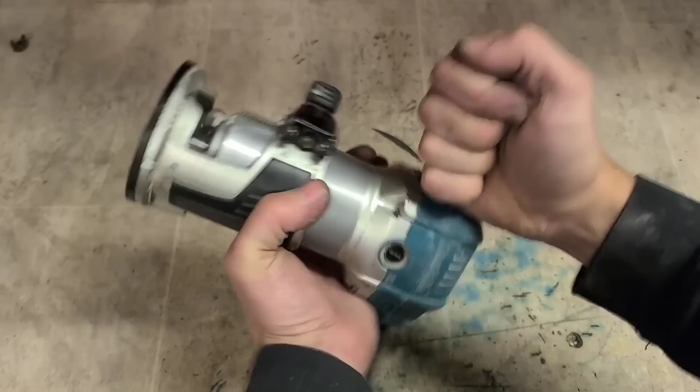Well folks, welcome back to the workshop. Today we're going to start off with a Bosch Jigsaw. This is a GST 150 BCE, one of the bigger corded Bosch Jigsaws from 2014, with a 780 watt motor. Good heavy, decent machine.

Let's see what's wrong with her. That's an odd one. Not seen that before.

It's just kind of pulsing. So I would imagine that will be a speed controller issue. Can't really be the motor because she's not running properly. It's not going to be the brushes because it's pulsing too regularly.

Yeah, let's see the speed controller. Get in and have a wee look. Hopefully there's an indication that's the speed controller. Don't think it could be the switch,

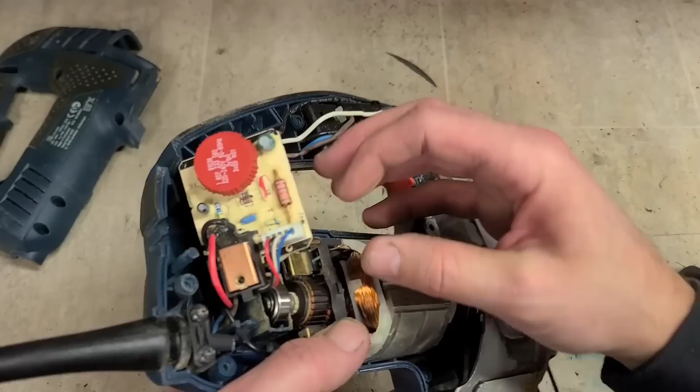Yeah, speed controller, that resistor's all burnt low. So a lot of current has run through that, causing it to actually melt this here glue, this binder. Right, we'll go with the speed controller.

Switch feels fine, I can't imagine much is going to go wrong with this. There might be variable speed on it, but there's also full speed, so if it's the switch, it should either work on the variable or the full. And I don't think it should cause any pulsing like that.

More than likely this here. So the wee MOSFET in here is not getting correct current or something, she's just pulsing and not running correctly. She caught there as well.

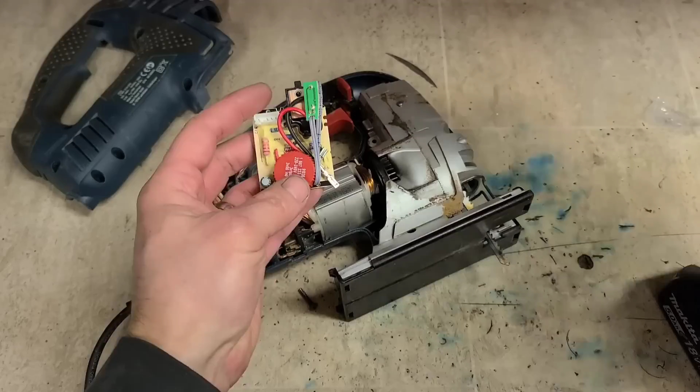Right, go with that, see if we can get a speed controller for it. Speed controller for this one is 1607233368, and she seems fairly straightforward too.

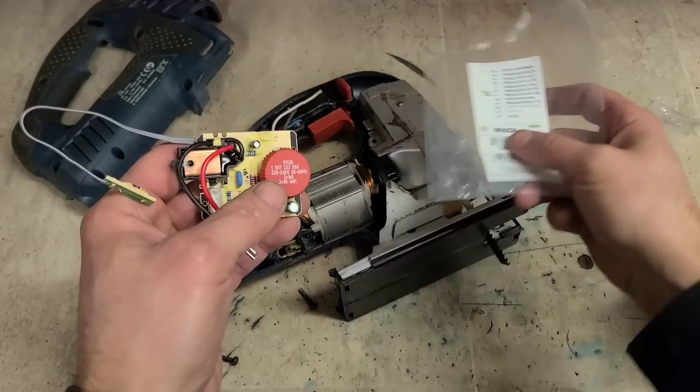There's actually written on the dial as well that it is the correct number. So if you ever don't have the breakdown diagram, you can just go by this here. Not often you actually see it on there, mainly because the cover is actually only letting you see this, you never see the face of it.

So which way is this going on now? Plugging on there, you've got a little wire running over here, little sensor is it? Yeah, for your speed control. And these two wires here, the black and the red, they must be going onto the field or something.

The red's going on here and the black is connecting to the field over there. And this one is just running to here. Pop that out and pop this one on.

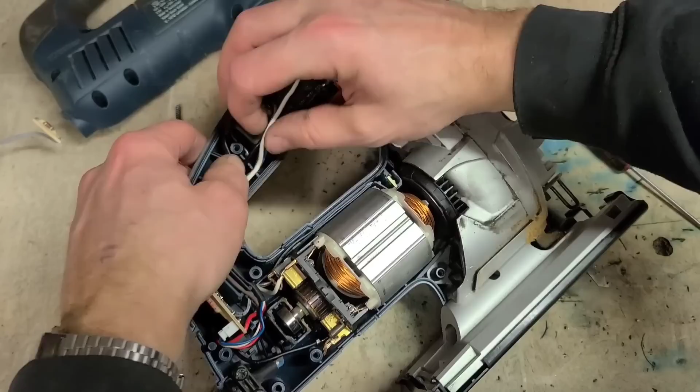One new speed controller and she's up and running. Not so bad, nice easy fix to start the day off with.

Now, might be quick and easy, but it's not cheap. That particular part, the speed controller, costs about €50 from Bosch. Expensive part, but still worth doing. This particular model of Bosch Jigsaw costs about €230, so that kind of money, that's less than a quarter of the price of the machine, so it's still well worth doing.

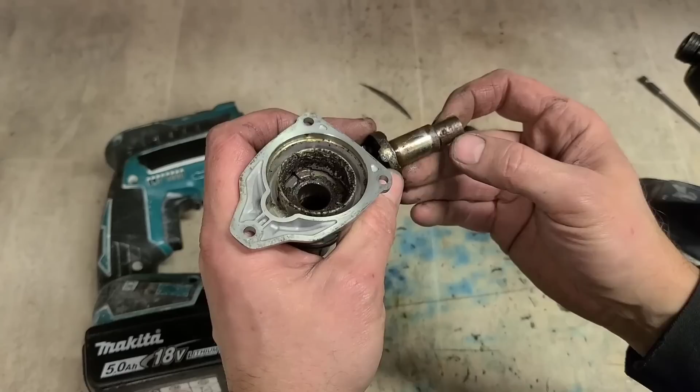Might just be a little bit of corrosion on it. The actual clutch isn't too bad either. So whenever you run this, the motor's always running, but the spring in between the two, it's only when you actually have a screw being pushed against it, when you bear it onto a screw to drive, it actually overcomes the spring and locks these two gears together.

That's just a wee clutch then built in. I think this is just dirty, to be honest. Maybe not so much dirty, but rusty. I think there's just corrosion on this. Give it a wash out, give it a wee rub with a bit of emery paper or fine wet and dry, see if that helps it out.

Actually, it wasn't even corrosion. There's a little bit of rust on this, but that didn't matter. It was actually just dirt packed in. There's a metal bush in here. I actually thought that went the whole way down. It didn't. It was actually just dirt jammed solid inside. Had to scrape it out with a flat blade screwdriver to get it cleaned out.

Now there's a little oil seal on this. It must be gone. But you can't buy that. You have to buy this whole head as one piece. Apart from the wee bits on the outside, you can't buy anything on the inside. But clean it out and it will run again.

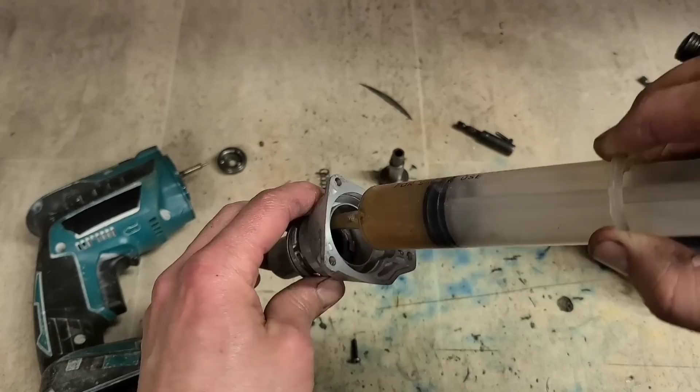Hopefully this is all this thing is going to need. Just get a bit of grease down in there too. There is an O-ring down in here as well. That was all packed out. It's a little bit more difficult to get that there cleaned. But there's also a wee flat ledge down there. Try to get some of that grease inside of it, just so there's like a little reservoir in there so it doesn't dry out as easy. Rather packed it with grease than with grit. And that should be it.

There's no problem now, look. A little bit of grease in that wee clutch. And a little down in there because that's actually a needle bearing inside of there. And your spring goes into the middle of it. And you can just stick this back together again. This part here is actually your little clutch.

You've got 3 steel balls that can slip if that gets too tight. As well, you've got 2 flat washers on top of this as well, just sit on top of one another. They're just sitting down on there, and then this just goes on top. It's not overly complicated.

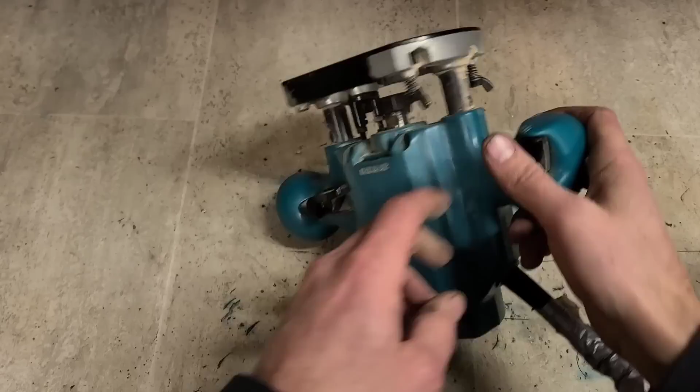Now, the bearings are gone too bad. Might not be able to be fixed. Could have melted the housing. That was on tight. Push out your lever and your very special nut. If the housing's been melted, it wouldn't really be worth replacing it, to be honest. So we'll have a look and see first. Never know, I could get lucky.

These are quite hardy wee machines. They can actually take quite a bit of abuse. So hopefully it is salvageable.

Not looking good when she's this tight to open.

Might need pry bars for this one.

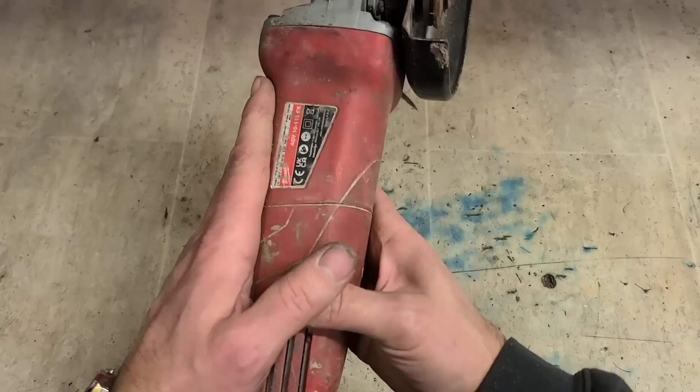Wee Milwaukee grinder, 110 volt. What's that? An AGV10115 KE. Not working. That one's just a power cable.

Now, that was a nice simple one. One Milwaukee grinder, just needing a power cable.

Now, next up is a very complicated and expensive repair for a Makita drill. Customer says it needs a new chuck. Luckily, I'm doing this long enough now, I know he's probably wrong. So, needs a new chuck because it's not holding anything. They all say the same thing. Say it needs a chuck, but they don't actually look at what the problem is.

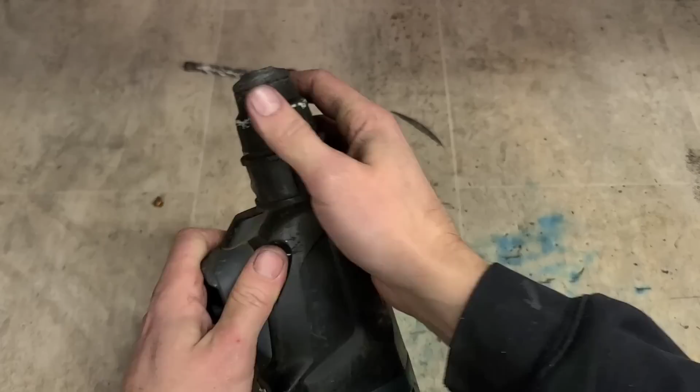Looks okay, but how can it be releasing the bit when the sleeve doesn't work, doesn't do anything? Watch this for a simple fix.

It's just a rubber cap. Pull that off. Ta-da!

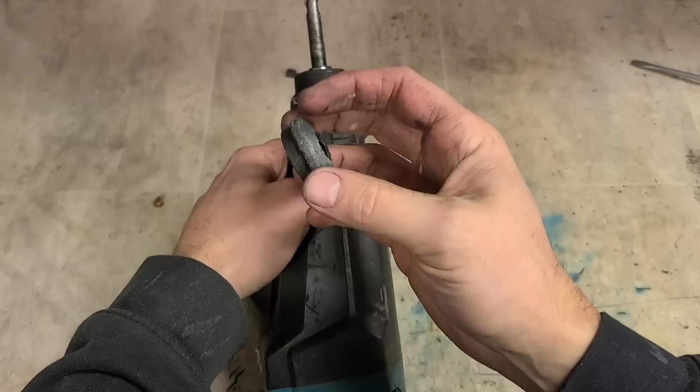This is the problem. The cap's actually worn. He's been drilling too close to the concrete, to the wall. He's been drilling all the way in. You can actually tell from the way it's worn here as well. He's been rubbing it off the concrete.

So as it's drilling, it's just eating away the rubber cap, which takes away the cap top end of it, which holds it on, and eventually it starts pressing down and down and down until it gets jammed up solid. So this is pressed on totally. It can't move and the sleeve can't come up again. Remove the cap and it works.

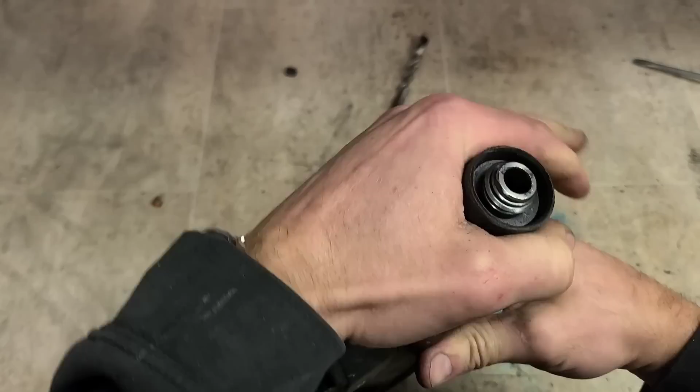Now, you also had this twisted, which generally you don't need to worry about, but this one we do, because this particular sleeve doesn't actually twist, it just goes up and down. Some of the older ones you could twist them around, didn't matter, or some of them you can twist it to lock it. This one's just straight up and down. Once you twist it, it gets into the wrong position and it no longer functions either. So just to make sure it doesn't happen again, we'll have to change that too.

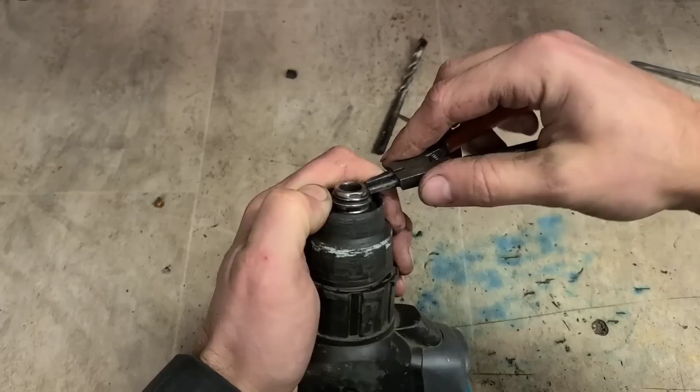So it's gone from a complicated, expensive repair to a cheap and cheerful, easy repair. Pop them off.

This man is probably wondering if it was even going to be worth fixing this thing, because the tool holder, the chuck, as he says, is actually part of the whole spindle of the machine. This goes all the way in, to the piston on the inside, which is a full strip and tear down, which can sometimes be an expensive repair.

Pop that wee boy off. Take that out. Everything else looks okay. I'll pop a wee bit of grease in there to make sure she's moving. And we'll replace these two parts, because this one here now, they're meant to have two flat spots. You can see that's rounded over now. So change them and we'll fix the problem.

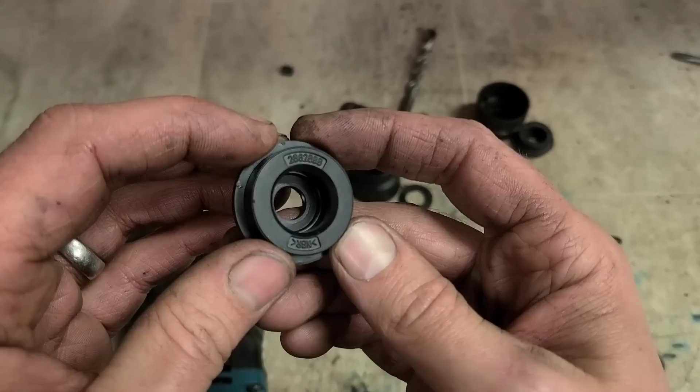Two new parts. They cost what? €1 or €2 each. So a very cheap repair. 451533-2 for the sleeve. And the actual cap, 286288-8. You get these all the time. This is quite a common repair for the Makita ones. But luckily, it's also nice and cheap.

Push them on. Put your clips back on again.

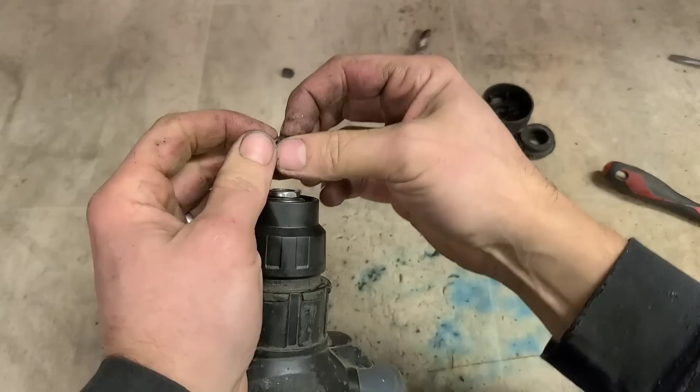Now if you're in a hole and you're stuck and need to get the thing running, you can also just pull off that rubber cap. And that'll do the same thing. But you eventually do want to replace it to keep the tool holder good and stop bits getting onto it. That's her.

No new chuck needed. There's no actual chuck on these, it's a tool holder. And for only a few euro, she's up and running again. That's one Makita HR2630 with a nice cheap and cheerful fix.

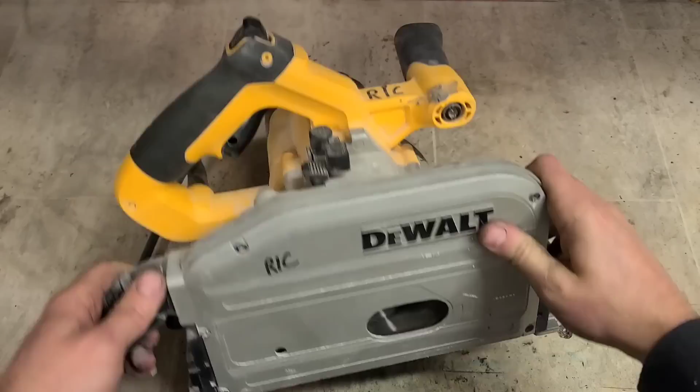Right, next up we have a Dewalt Plunge saw. Customer says this one has a sticking trigger. This is the DWS520 Type 3. Not sure the year of this one, doesn't look too old, a wee bit dusty, but I don't think it's done a wild lot of work.

Blade spins. I don't think that's the trigger. I think that's the actual lock. See this boy up here? That's not. Something's jamming that. If you push it hard enough, the trigger does want to go on.

But she doesn't seem to be plunging either. So unless the lock in here is gone. Crack her open, let's see what the crack is.

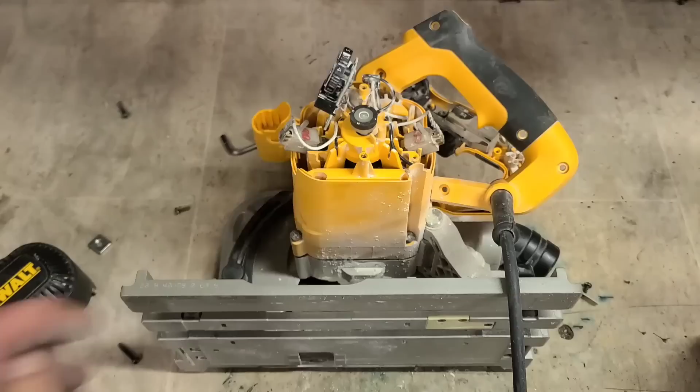Lovely. Take off the taco on top as well. Now, is that pressed or threaded on? I'm going to guess and say it's pressed on because there's no real reason to thread it on. Yeah, just pressed.

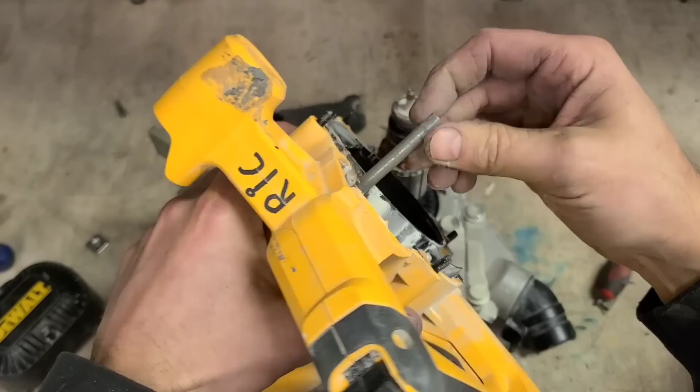This is the spindle bar that's coming up, that seems to be getting tight or jamming on something. Bearings seem okay anyway. See, with that out, it's actually moving no problem. So it's just jamming up on something here.

Unless it just got jammed with dirt or something. The mechanism down here seems to be working. The lock and release is working. The knob is working.

Right, a chance giving this a blow down. Clean out on here, might just be the dust. Can't really see anything else that's going to be causing that. With it removed, it does actually plunge as well. And it's free enough, so we'll clean all this down and put her back together again.

Right, this might be as simple as dust. Don't know what this man is cutting, but it looks like chalk dust, plasterboard or something. Maybe I don't know why you'd be using it, but I can't see why you'd be using a plunge saw for cutting plasterboard. All packed up out in here, loads of it sort of spewing out everywhere. Every nook and cranny was actually covered in it. So hopefully it is just dust that's the problem. We'll soon see when we put her back together again.

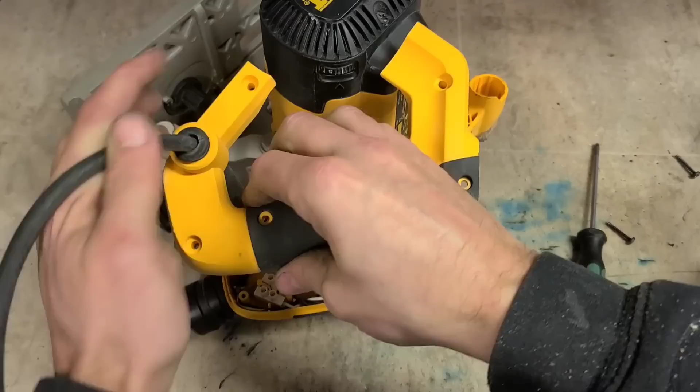Just to go on together. Handle as well, it's all cleaned out too. Just make sure I haven't moved anything. Lever still in place.

No, that's still not right. There... should be nothing else on there getting in the way.

Even more dust on here, look. I'll clean this out first. At least that's just normal sawdust. Can't see anything from this end. It's a sealed housing there.

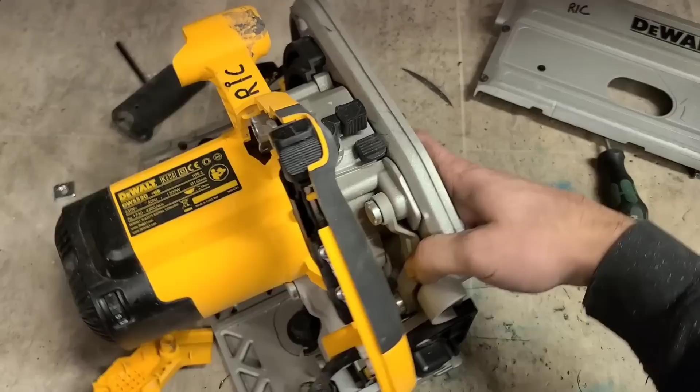Yes, we're going back in again.

That's definitely working. This definitely moves. So which is at fault?

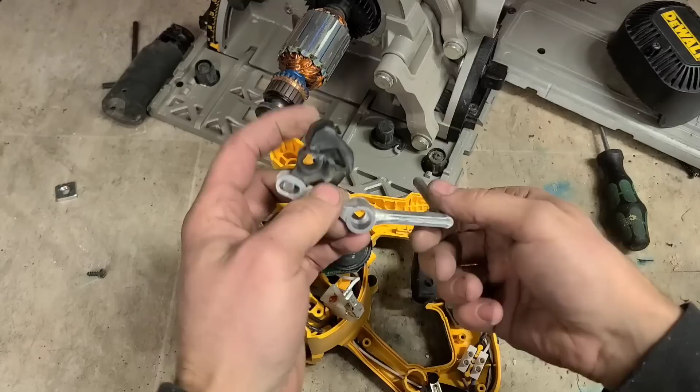This one's in the middle. It's locked. When it goes up, it's free to move. Whenever I go on here, it goes down halfway or something. It goes in, that's free enough.

But it doesn't do that when it's installed. It's nearly as if it's jammed. Could it just be the way it's installed?

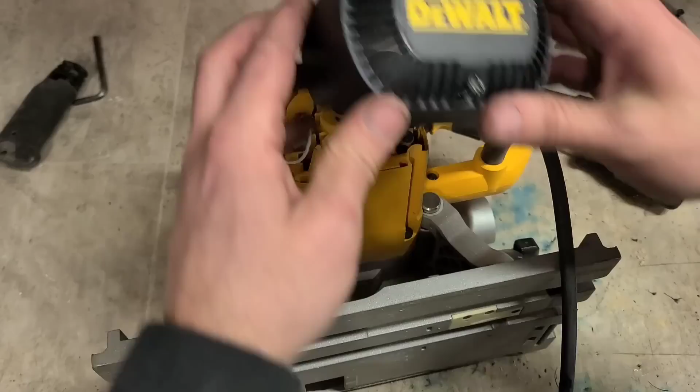Must need to go on with speed control. Yeah, put the two in together.

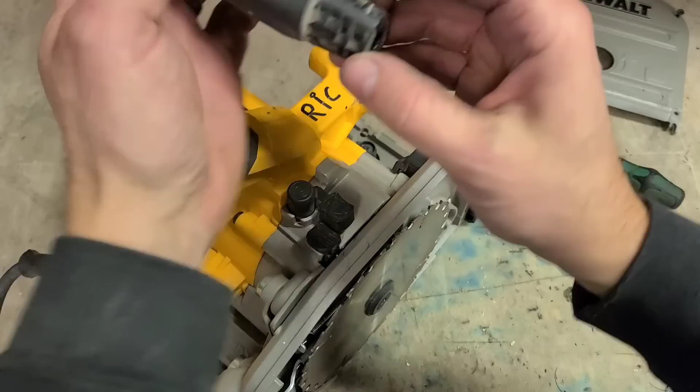Handle then, big square nut inside of it. And that just screws on.

I think this is still working. Yep, might have been all she was - dirt and dust and misaligned.

Back the Allen key, and that should be her. Switch is going up, releasing, plunging, no problem. Got to make sure she actually switches on.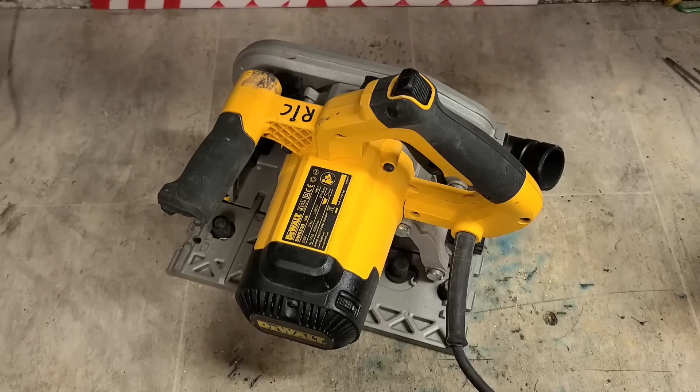That's her. One DWS520 Dewalt Plunge saw, 240 volt. With a sticking switch and not plunging.

Problem is just dirt and grit getting in and jamming up that hole, or else somebody's had this off before and put it on with the actual pin, the bar pressed against the actual side of the lever inside here and jammed it. But I would think it is actually just the dust that was inside blocking it up. But that's her, up and running.

Now, what am I meant to do with this mess? Look at the state of this one. Obviously, cutting a lot of concrete with a diamond disc.

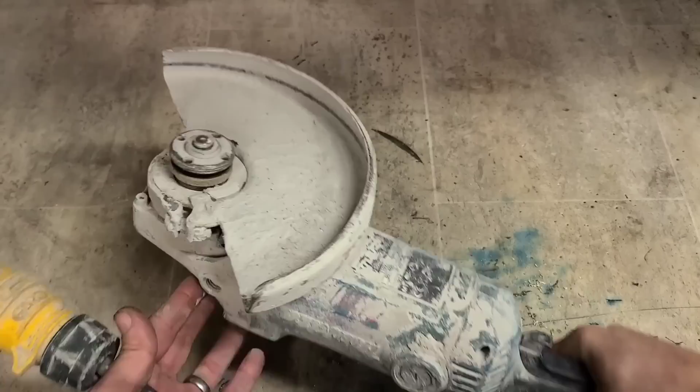That guard's bent that way, it's meant to sit there. But she's a bit dusty. There's actually a 7-inch grinder, is it? No, it's the cheaper 9-inch. There's the GA9050. These are just a wee cheap and cheerful machine, to be quite honest, from Makita.

These are actually, as you can tell from the size of it, actually a 7-inch grinder. So these are a very good 7-inch grinder, but they've changed the head and the gears to make it into a 9-inch. So this is actually very cheap. It actually works out cheaper than the small Makita grinder, the GA9020.

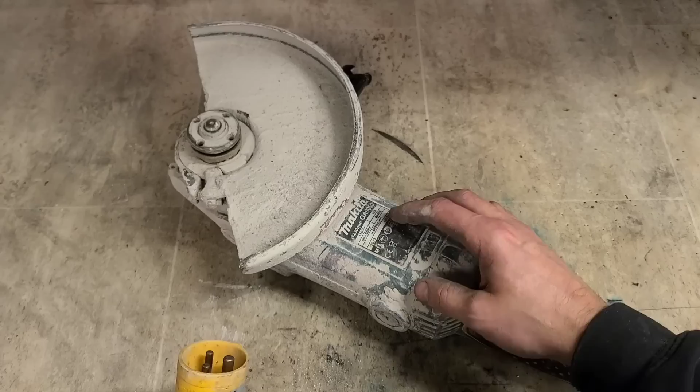The numbers make this a little bit confusing actually, because the small 9-inch Makita grinder, the good one, is the GA9020. Then the good big heavy duty one with the bigger motor is the GA9040. But this one's the GA9050. Bigger number, makes you think it's the bigger grinder, but it's actually the smallest of the lot.

2000 watt motor, wee tiny head in it. More of a space saver, to be quite honest, because of the small head. You might be able to get in tighter spaces, but that's about it. They're not up for much work, to be quite honest.

This one, mind you, is doing fairly well. She's actually a 2013, so she's 11 or 12 years of work behind her already. But wouldn't recommend them if you're looking for a 9-inch grinder. If you're doing a heavy sort of work, they're not good enough for a small compact 9-inch grinder. If you're doing lighter sort of stuff, or if you need to get in somewhere tight with the head, that's what they're good for. For most other things, I wouldn't recommend them.

Have one of these myself at the house, and I know from the armature, the actual spindle of it ain't up to scratch for the amount of work that it can be doing. But what's wrong with this one? Nope.

She's a bit farty. Don't know if that's the motor. She's 2013, so it could just be brushes actually. Yep. That brush is going alright. Gone but not worn out.

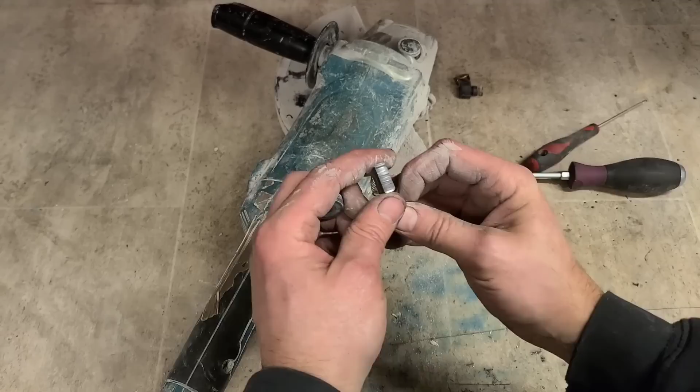That one's still making contact. Wouldn't be worth putting a motor onto one of these. She's a bit black on the inside. Oh, that's a wee bit of, that segment's a little bit blacker, I don't know.

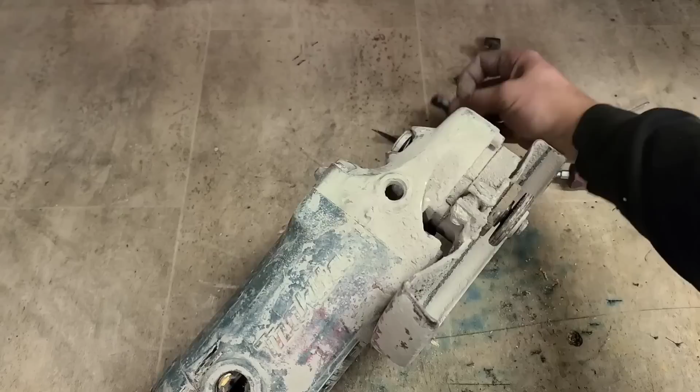I was going to say she might be alright. She could still be alright because she wasn't making contact. She'd be doing all that spluttering and sparking and burning up the armature like that. Can make it look very bad.

That's just black carbon from burning and from the brushes themselves. It's nothing really to worry about. You don't have to strip it apart just to clean that. You're not making any improvement by actually just wiping the armature. You make it look better, but it's not going to do any improvement on it. It'll look the exact same way once you actually start running the machine again.

The dirt that's on there now, if it is okay and it does run, it'll actually clean itself anyway with the brushes, so don't worry about that. Stick a new set of brushes in, see she runs. If she's good enough, leave her at that there. Now, brushes for this.

That's funny, two different sets of brushes are actually in this. This is a 204, the broken one, and the good one is a 203. Now the correct brushes for it, going by the breakdown diagram, is the 204s. That's the correct brush for this machine. This one is actually for different machines, some routers and grinders.

They're both the same size, going to do the exact same job, same ends. There's a little bit of a difference on the end, as this one has a wee bit sticking up and this one doesn't. But the biggest difference is the price. 204s cost about €24 a set, these here cost around €13 a set. So you can go for the right ones and pay more, or just go for the cheaper set, which I'm going to do now because I don't want to waste a good set of brushes on this thing, and they'll do the same job.

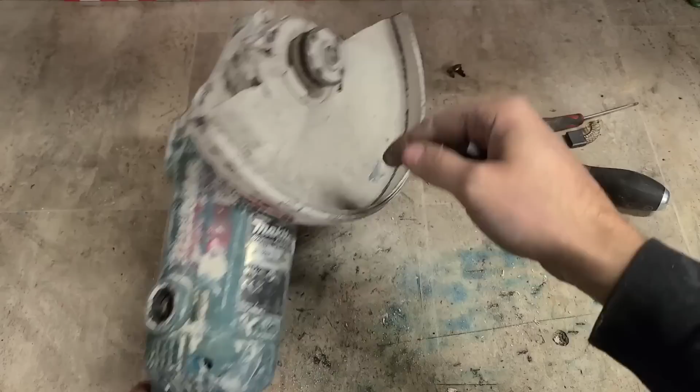That took off a lot less than I thought. All this here is just hard cement stuck onto it now. You could clean it if you want, but there ain't much point. Whoever owns it is going to be using it for the exact same job, and it's just going to end up the exact same way.

That's her, one set of brushes keeps her running. Just one brush - it started to burn, was losing contact. The bearings do sound a wee bit rough on it, not bad like, but you can hear them a little bit. I wouldn't be willing to do much more work to that thing though. Going by the amount of work it's done, its age, the fact the brushes did burn, plus the fact you have to strip it down to actually change the bearings, it might not be worth doing. Customer probably just wants it up and running again to keep it going for a while longer, so a set of brushes is just a cheap fix, and that'll do the job.

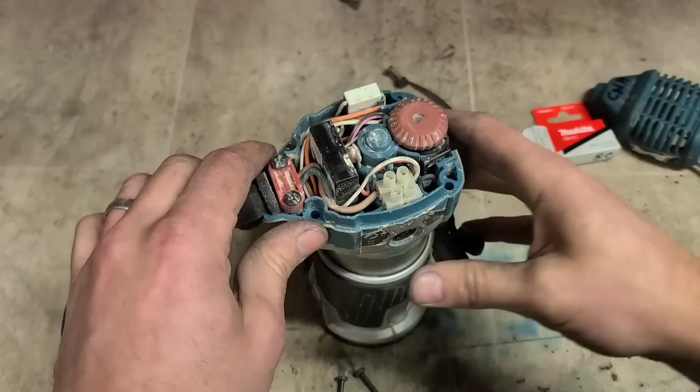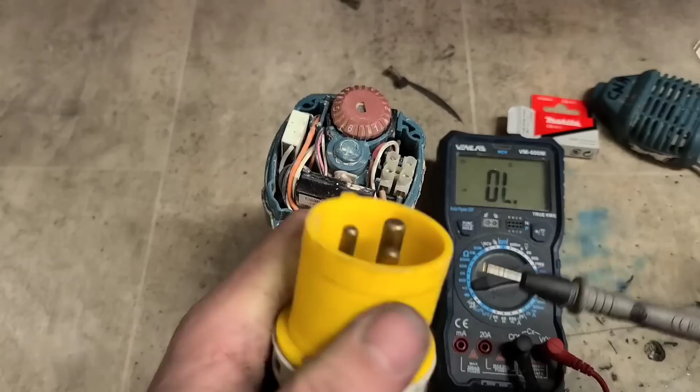First thing's the lead. It's not the lead.

Next one's the switch. Could be the switch, there's no cover on it. It's giving me nothing, so we'll chance that.

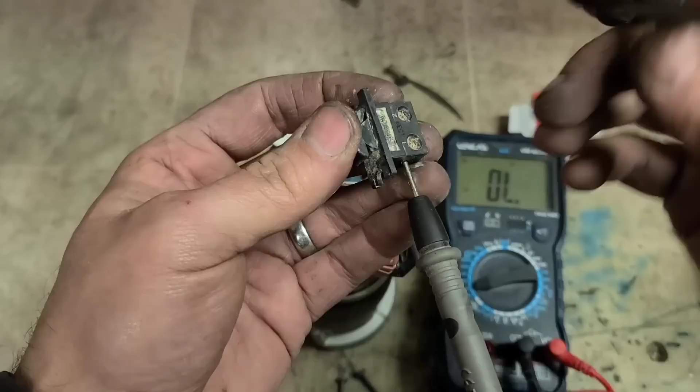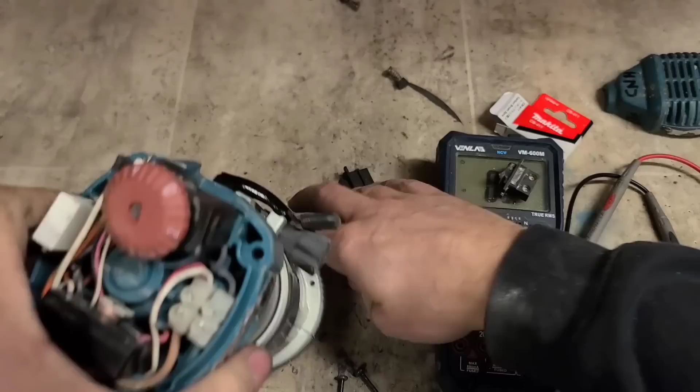Kind of making contact, but not very well. And there's no way to open that, so a new switch is needed. Let's just give the inside of this a quick wee clean. Not necessary, but may as well do it while we have her open.

Make sure. Hopefully that should do her. Drop that down in there. The little speed control wheel should go on top. Make sure everything's down, and that should hopefully be it.

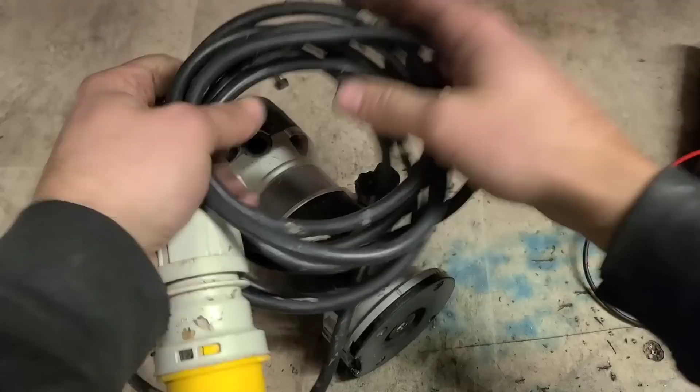Now we're on to the cheap and cheerfuls. Erbauer 5-inch sander, a Screwfix machine. What is she, the ER0400? What's wrong with this one?

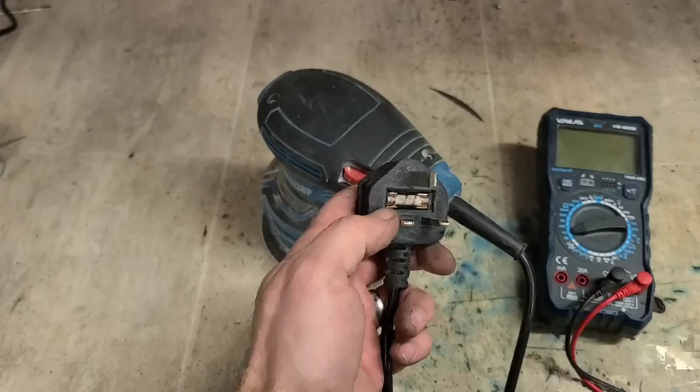Doing nothing. Could that have something to do with it? We have a bit of copper wrapped around the actual fuse, and it's wrapped around right, so it should still work. Wouldn't recommend it, but it narrows down the possibilities. Unless this was blowing fuses, so it could be blown out.

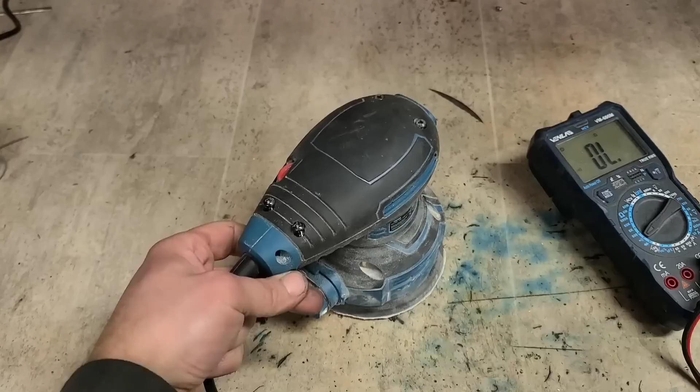What way is that? No, that's not right. Always check the simple stuff first.

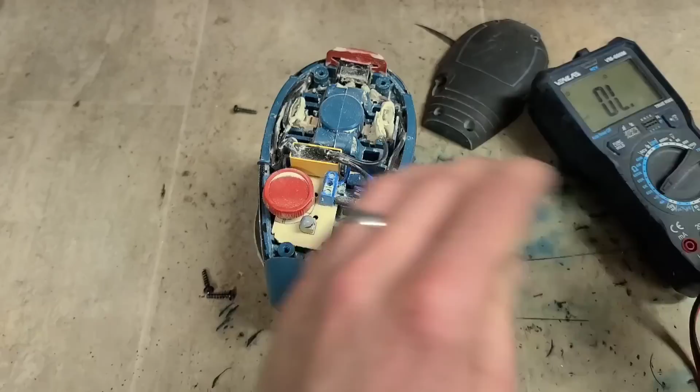Just like a Makita or a Dewalt sander, these little switches always give trouble. You just get clogged with dust and dirt, which I would say this one's also done.

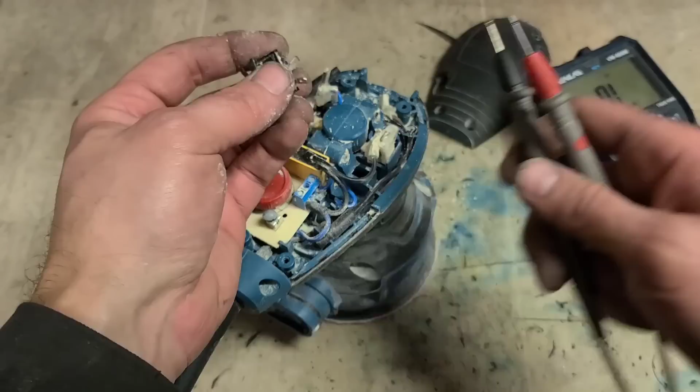There we go, there's a spring clip in the end, you have to push it on to get it to release. That's the problem.

Right, we'll try a quick fix on this because I'm not going to be able to get one of these, and going by the shape of it I'll have a hard time sourcing one. So we'll give it a quick blow with the compressor and we'll quickly fix that.

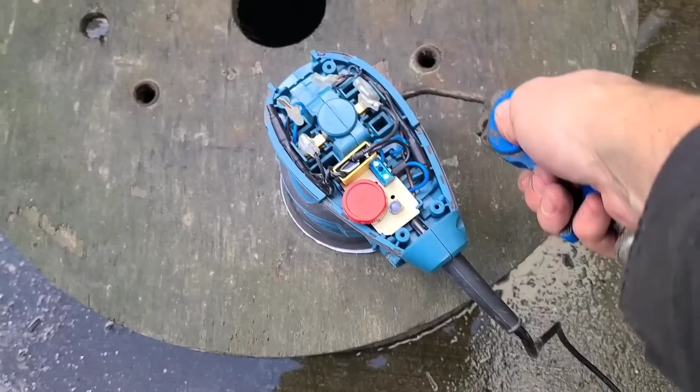Now the fix for this is nothing special, just an airline. Just clean out the dust. And that should cure it.

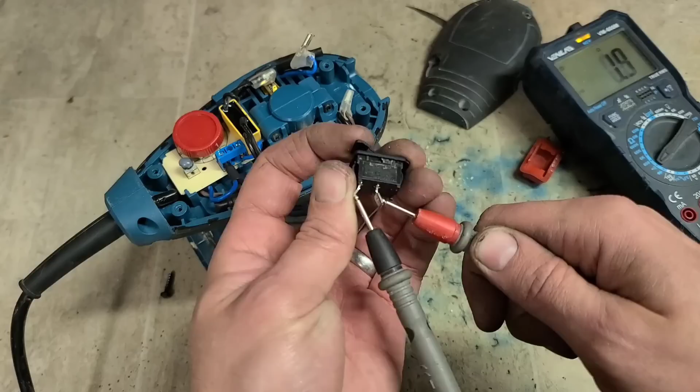Does that cure it? Simple as that. If that doesn't work and the air compressor doesn't get it cleaned out, get some contact cleaner and just flood it with the contact cleaner, flick it back and forth, and then use an air compressor again, and that should get her cleaned out.

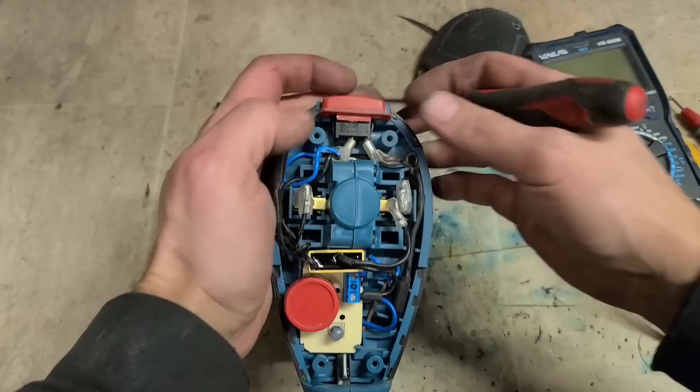Might be better that way around, with the spade facing up the way. Yeah, that'll be better. It's better.

Didn't need to take these two little side ones out at all. Give her a try there now.

What could be wrong with that? Can't really fault Erbauer for that, because even the Makita, the Dewalt and all have the same problem. But at least with them ones you can actually replace the switch. Well, I say that, you can do that for the Makita, not so much for the Dewalt, depending on which model.

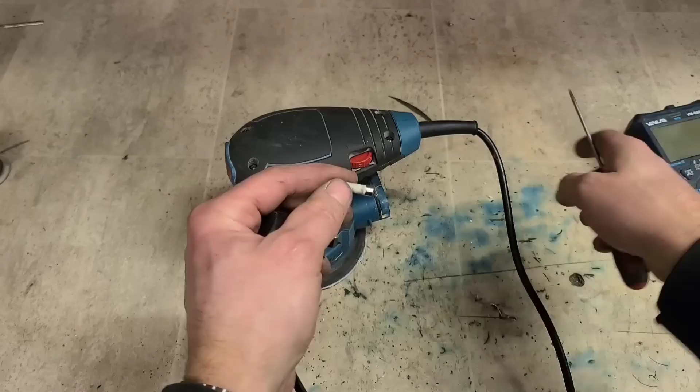Not even need a little piece of copper. Nope, nothing wrong with it. Don't have the cover for the fuse, but it doesn't really matter anyway. You can't really electrocute yourself anyway, because once it's plugged in, it's against the socket anyway.

But just for the hell of it, we'll just stick another one on, because they're only a generic thing anyway. They're only off these molded plugs. They're basically all the same. Just to keep the boy right.

Right, that's her. A wee Erbauer sander, up and running again, just with a compressor. And the next up is another wee Erbauer sander. Exact same one again. This one just has the dust box or dust bag on it.

Yeah, ER0400, exact same model. Wonder if it's the exact same problem. This one hasn't been opened. I'm guessing it is. If it's the same thing, we'll know what a common problem for this thing is.

And if you have one and it stops working, you can nearly guarantee it'll be this. Crack open here first and see. Looks the same inside anyway, same condition.

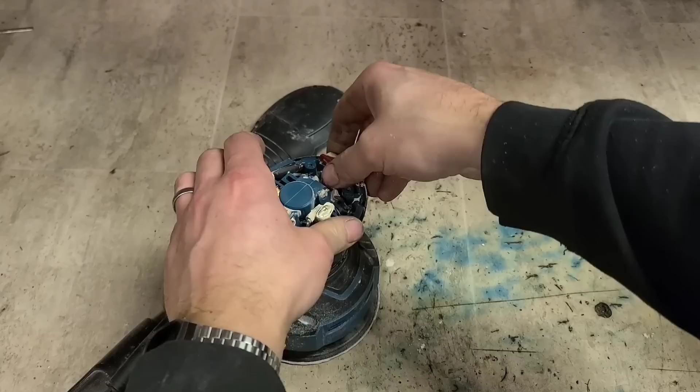To get them off, you have to just squeeze that little pin up at the end of the spade, or you can just slide off that wee silicone bit. Exact same thing, it's just a little micro switch, and it's doing nothing. Same thing out of the compressor.

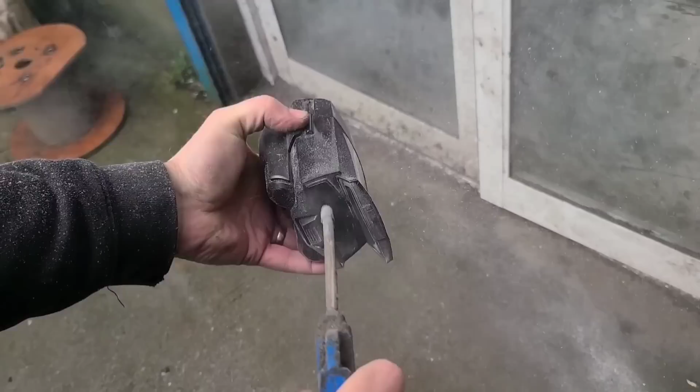Problem. The dust box in this thing actually looks more impressive than the tool. Mind you, there's no filtration in it. It's just straight through, it's just relying on the dust settling.

Test this again just to make sure. Very, very common problem for these wee switches. Actually, still no good.

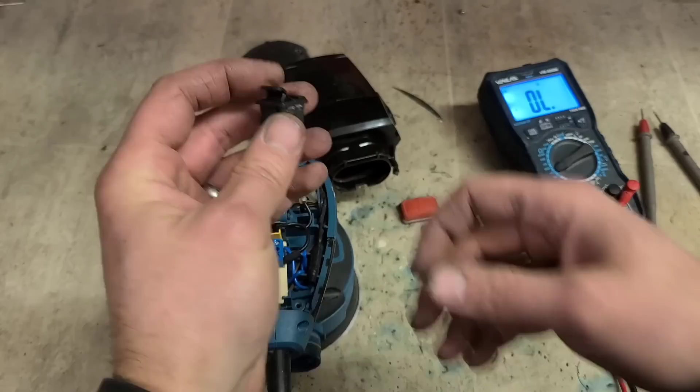Move on to the contact cleaner. You hear the difference now. Just blow out with the compressor again, just to be sure. Spot on.

So now we know exactly which way it goes on after the last one. Two spades with the wires facing up. And the actual cover is marked as well, so make sure you put that on the right way around. And that's it, another one ready to go.

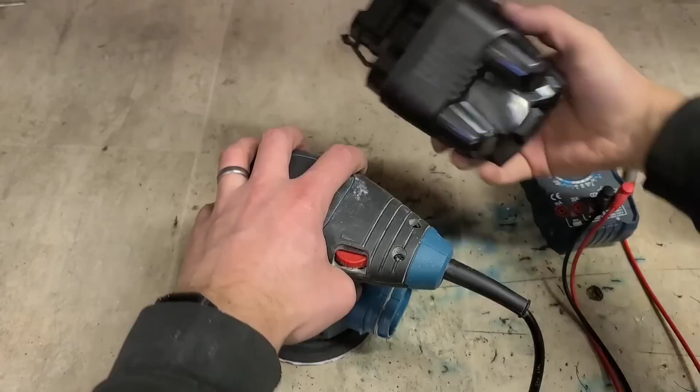That way round. That's her, another wee Erbauer. If you have one of these 5-inch Velcro sanders from Erbauer and it stops working, definitely check that little switch.

Might have a little grommet at the front, but they're never completely 100% protected. That's just stopping the glue and dirt from your fingers getting on the switch. But the dust from the machine is still getting sucked through the vents and eventually lands in the back here and behind the actual grommet anyway, so dust will still get on. If she stops dead or stops working when switching on, check that switch.

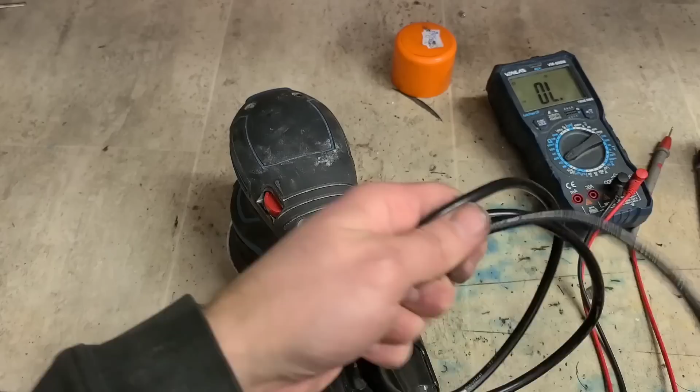All you need is a compressor and maybe a little bit of contact cleaner. Should be nothing else wrong with it. Shouldn't have to replace it, but if you did have to, any wee rocker switch like that will do. They'll all be roughly about the same size, but they mightn't have the little fins at the front. That's her.

Now we have a very old one, an old Bosch Jigsaw. This is the GST 60 PBE. I think that's a 60 anyway, we can go with the long number anyway. Well, we can kind of make it out. This is a proper old school tool, probably made in Switzerland. Yep, made in Switzerland, good heavy duty Bosch.

Now, don't think there's much wrong with this, but luckily, even if there's a wee small fault, you can still actually get parts for them. Or at least some of them, I think. She's supposed to be still working.

She has variable speed, but by the looks of it, that variable speed has never been varied. Number 6, spotless - that thing's never been adjusted, it's been on number 6 constantly. Where you'd expect it, to be honest.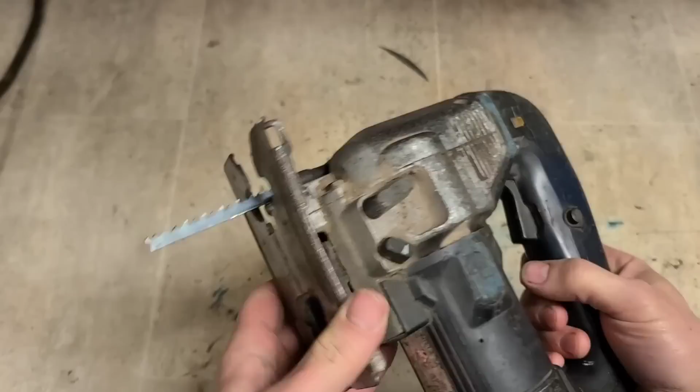The only problem with her is the little wheel for pushing back in the blade. That's the only thing wrong with this thing, supposedly. So I want to see if you can actually still get one of these, and see if I have one in stock.

So there's a few variations, not much difference - different voltages, ones from different countries, a few different variations. The one I want is 642, which is this one. That is the old breakdown diagram for her.

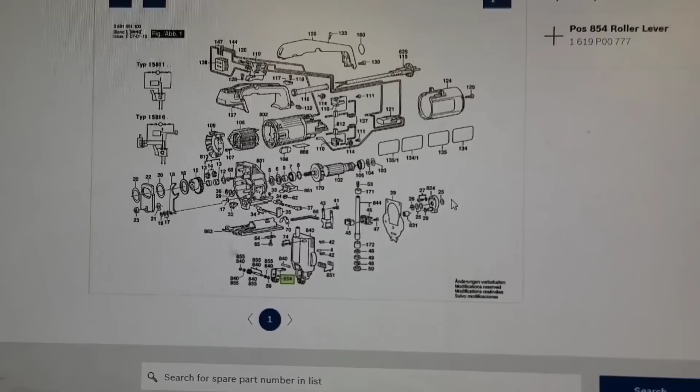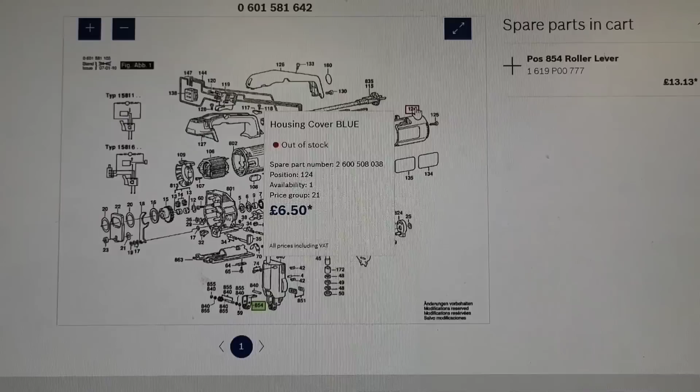Now, some parts are available, some aren't. You can still get things like the cogs, the armature is even still available. The wee switch, though, even one of these small bits is actually gone - these slide switches. And the filter capacitor is gone, but you never need that anyway. Some of the bits out of stock, some's available, some's not. But what I need is down here.

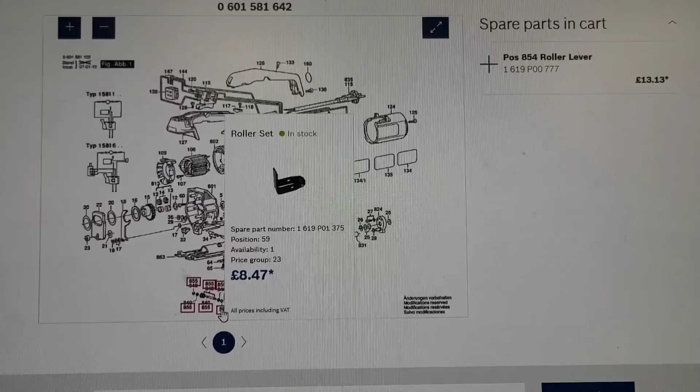And that's still available - the roller set. You buy it as one kit, the way I'm going to do it. It actually shows you them broken down as well, but yeah, that's just a frame, not much use. We'll go with the whole thing, quick and easy, just drop it on and out.

So the old Bosch Jigsaw box, the 60s and the 85s. Do I have a wheel for it? I have the wee pins for it. No rollers.

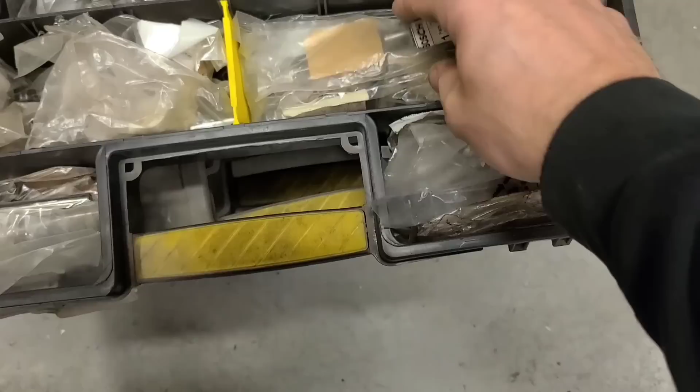That's a different one. Lifting rods, lifting rods, lifting rods and bases. I need a roller, that's that one. That looks promising. Don't know the number, mind you. That's a bit of, how would you say, old stock. It's been opened before anyway.

Now that's it, the very one. Comes with a wee kit, a felt sleeve for sealing, and a new pin for locking it on.

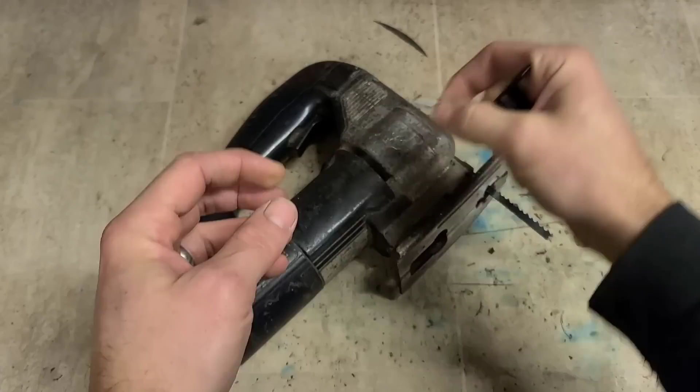Right, see if we can change this. You get the blade out first. These really old ones have no quick release to release the actual blade. One thing you have is a hole up on the top that you need a long screwdriver for. That goes all the way down through the center of the tool holder, the actual lifting rod, and there's a screw on top of it.

Back out the screw, and you can remove your blade. They still took the modern T-shank blades as well, not just the older ones.

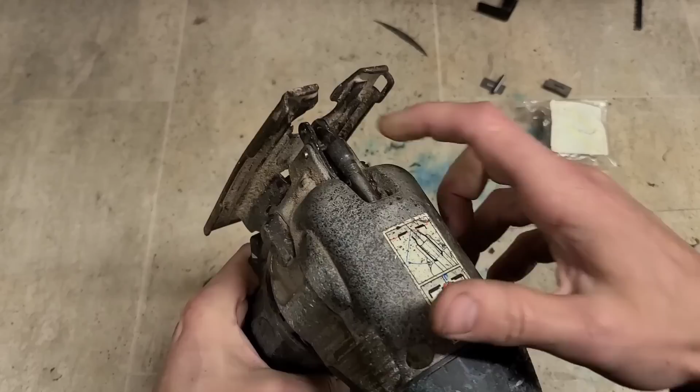Get that up, get this thing knocked out. All I need to do is remove this here pin. You don't see me taking a hammer and punch to a modern jigsaw. Knock it out. Pull out your old one.

I don't know if I'm going to be able to change that seal without stripping it all down.

So we've got a wee bit of wear on her. That little felt sleeve that comes with the pack is actually back in here, so you have to dismantle the gearbox to get that out. To do that, you have to remove the top handle and everything - you have to do a fair bit of stripping just to replace that little sleeve.

If you're servicing it, yes, you'd go to the bother of doing it, but just to replace the roller, I don't think it's worth it. Plus that lifting rod's got a wee bit of play, and it's done quite a bit of work - let's face it, she's not a fresh machine. The base is all bent in her as well. Better off just doing a quick fix, getting her up and running again.

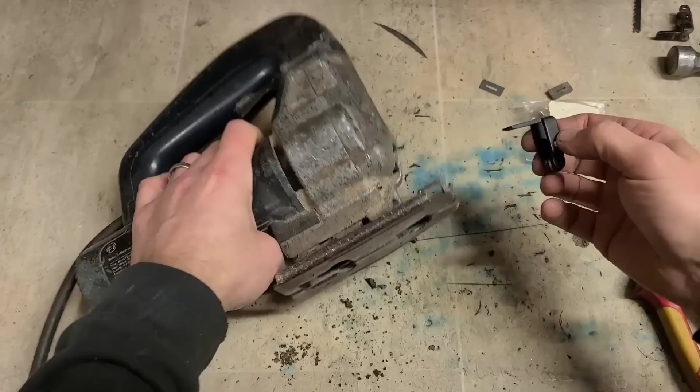Because at the end of the day, the old felt sleeve's still on there - it's going to be doing the same job. Drop that on, get your new pin.

I'll do it the same way she came out - might be easier. She only actually goes through one way, so she's tighter that side. You can only actually punch it out this way, put it in that way.

That should be it, quick and easy fix, on an old Bosch jigsaw. Push that back in, put it onto the roller, tighten up your screw. That's it.